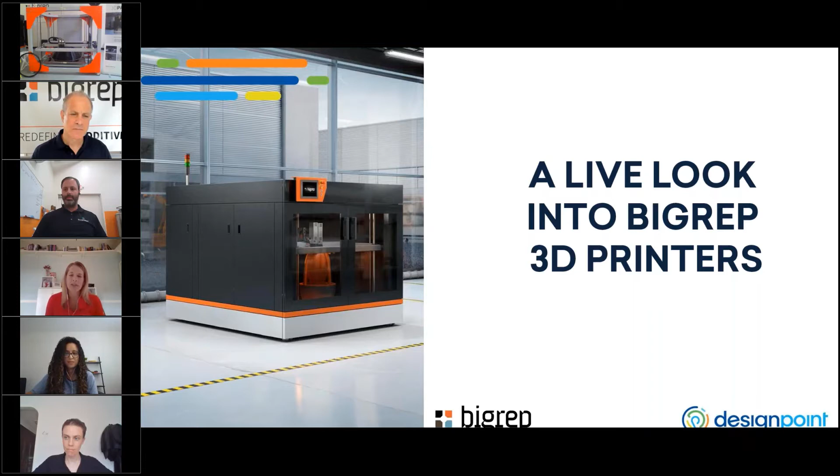What we're going to do today is kick it off with Andrew and Frank. They're just going to give a pretty high-level introduction to who BigRep is and Design Point, and I'm sure many of you already know that. Then we're going to go live to Chris in Boston to do a demo. He will give a demo on the 1, the Pro, and the G2. And after each one, he's going to pause for questions.

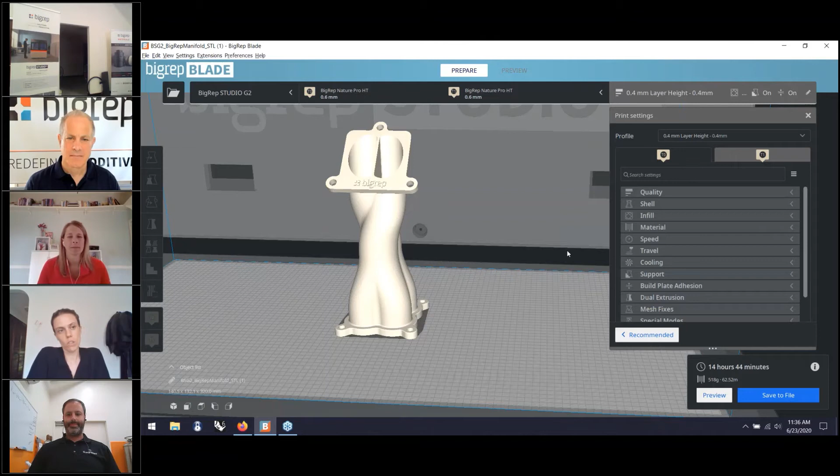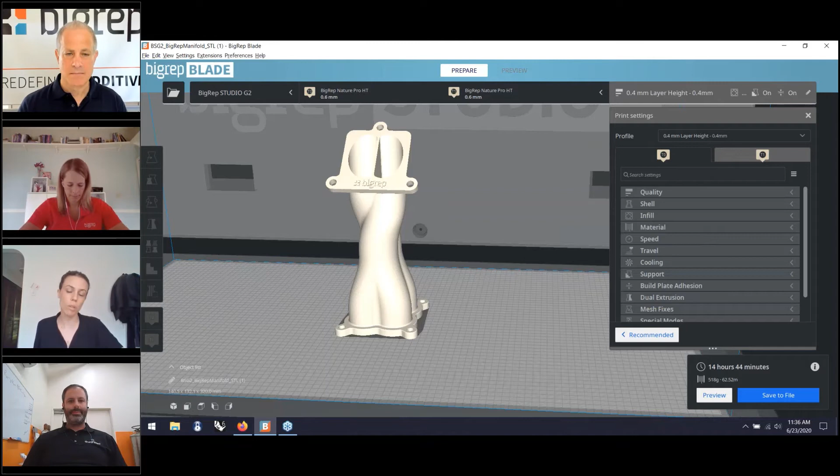I'm here to talk a little bit about our in-house slicing software called BigRep Blade. It's been developed over the last year and a half in-house with our software team, working together with R&D, materials, and our engineers to make the most optimal slicing software, particularly for large format printing and BigRep machines. As you can see, the layout looks slightly like Cura.

If you've used Cura in the past, this will probably feel familiar to you. Also, it is free software that we provide via our website, free for download if you'd like to have a look at it after this webinar.

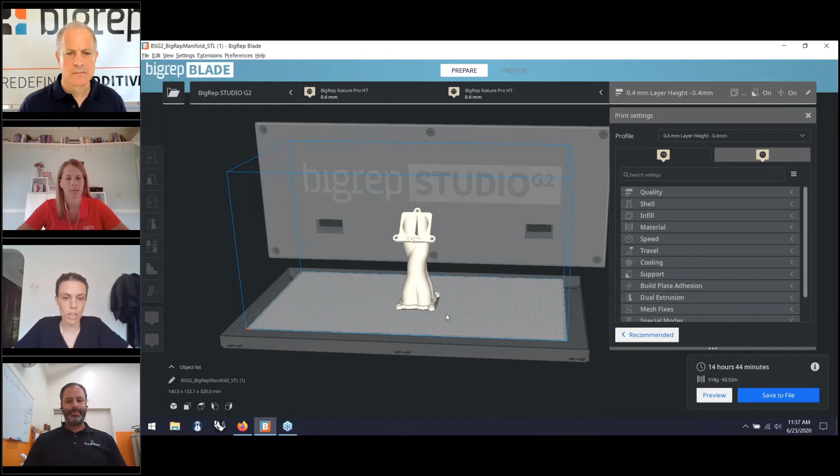Some important parts that we integrated after working with third-party software for a long time was really getting options to help you optimize speed and material usage. So as you can see here, I have the BigRep Studio G2 machine loaded up, and this is one of our test parts, a manifold part.

You can see up here you're able to switch your machines according to which one you're using. On the side here you have all your typical tools in terms of scaling, rotating, and moving. And up here you have the dual extrusion options, both our hot ends, both extruders, T0 and T1, and then a list of all sorts of different materials you can use on our machines.

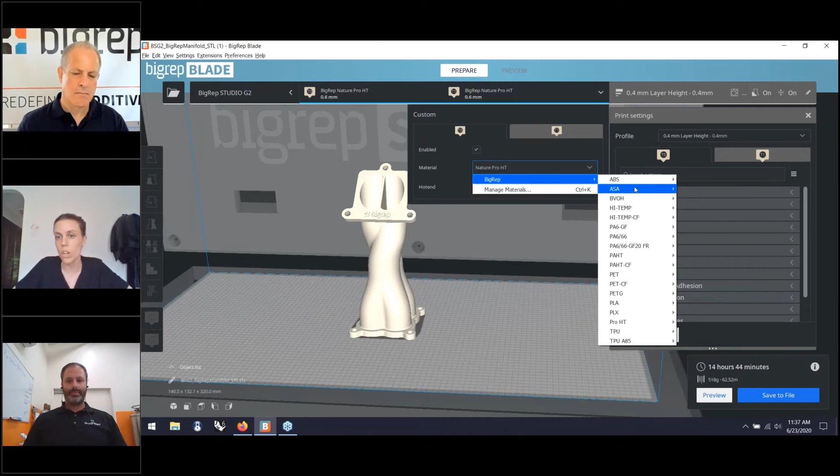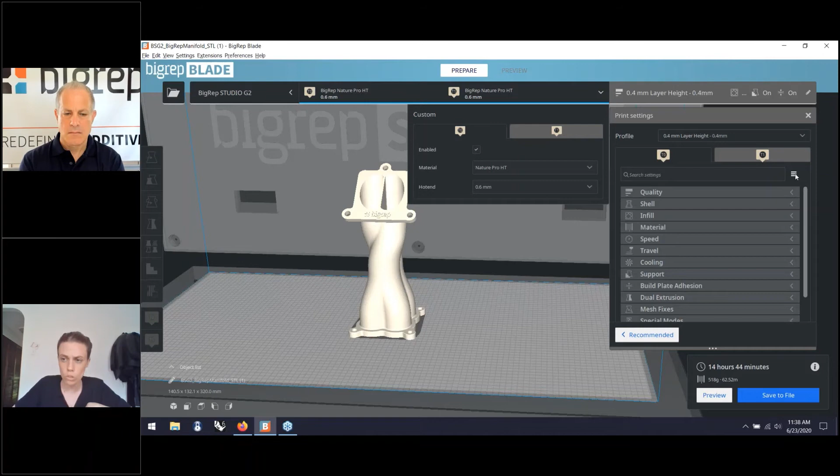The great part also is that we provide you with presets, essentially. So if you don't feel super comfortable slicing and you purchase a machine, or you're new to 3D printing, our team has worked on setting up the best possible options for you. But you can also go in if you are really experienced and tweak and make a lot of changes particular to your print and what you want.

I will go to preview here as I've already sliced the file, just to make it a little bit quicker. The other great part is seeing that preview of your print. That's something we pride ourselves on, that we have a really great preview. You can also slice down and see how the part will build itself up.

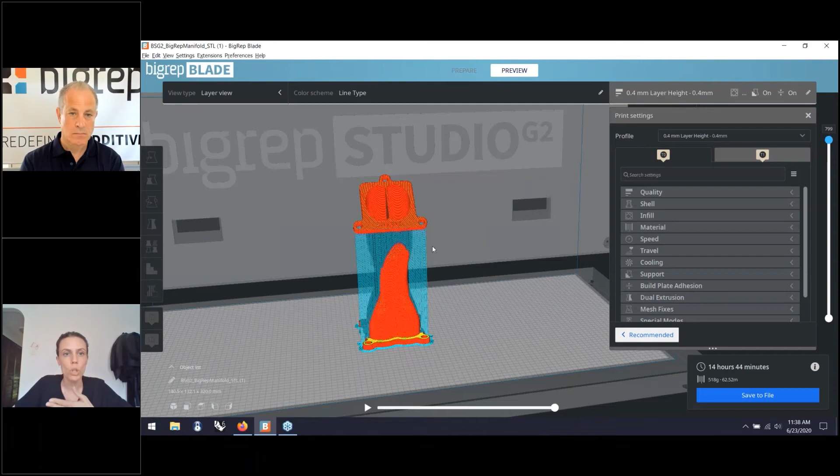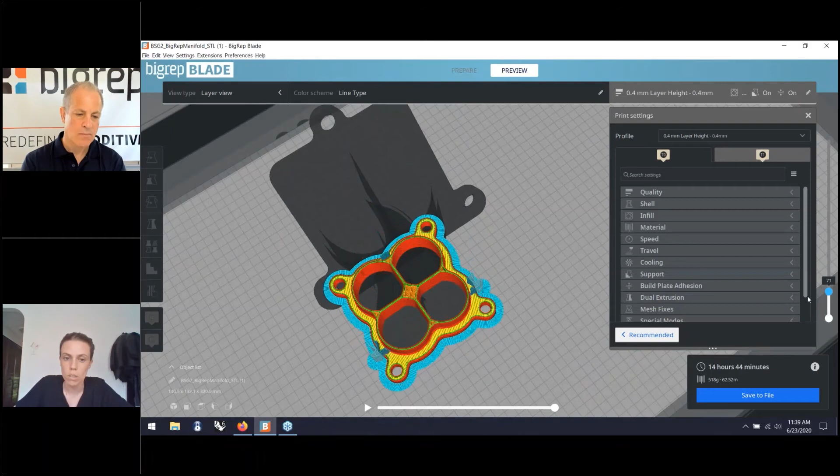Right now I have it on a view showing colors specific to what the line type is. You'll see that red is our outer loop, blue is support structure. This bright blue down here is actually a brim to help hold it onto the bed. Yellow is top surface. As we move through this part, you'll also see infill and what the interior looks like. It's really great to show you the expectation of what you should see when your print finishes.

Lastly, down here you'll see your print time, which we pride ourselves is very on point. You'll also see the amount of material you use, so it allows for easy pricing out. It also breaks it down into what exactly, if you hover over this info button, is taking the most time and what isn't. That's just a further step in terms of optimizing your print and making it faster.

Anyone from my team have points to add to this?

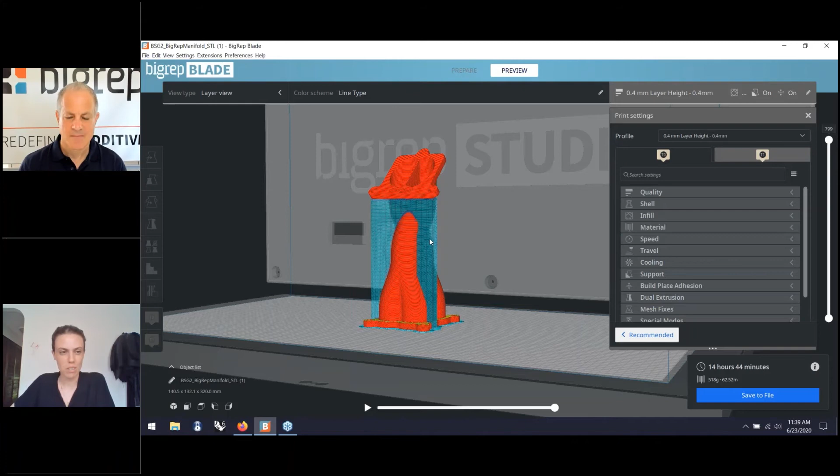Just one quick question we've got: do you have to use this software? You don't have to, except for our Pro machine. For the Pro, you do have to use it because of our new MXT technology. But otherwise, if you're working with our Studio machine or R1, we still offer factory files for Simplify 3D, a third-party software. You can also use Cura or other slicing software. But since this is a free software, we do recommend using it, as it's where we've spent the most time figuring out what would work best on BigRep printers.

Right, great. Does anyone have any questions for Maggie? I mean, it looks so easy.

I guess one last thing I'll say is when you go from Blade, you'll see here save to file. So how you upload onto the machine is either through your computer if you're connected with an Ethernet cable, or you can just easily save it to a USB and upload it manually.

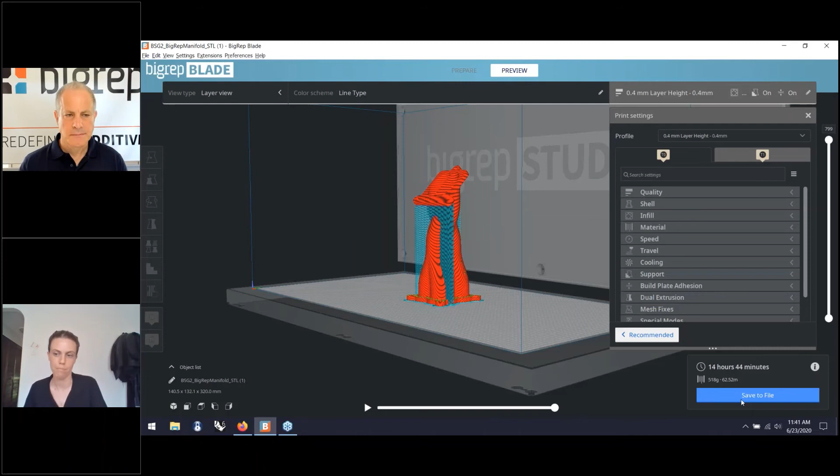Great, very important there.

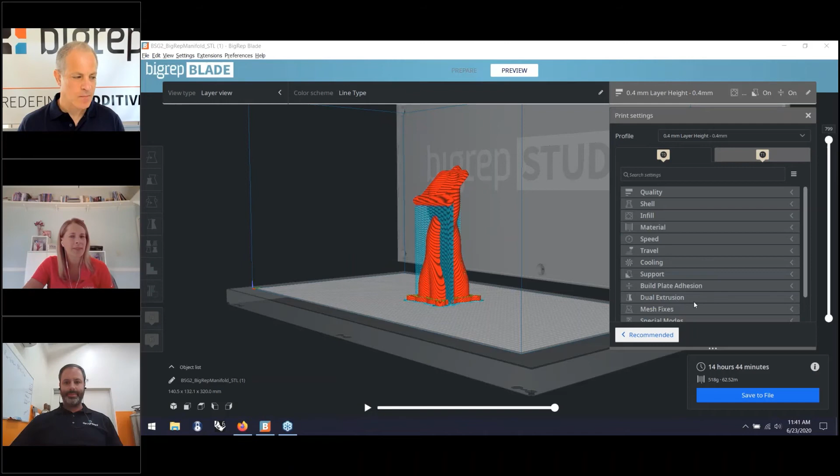Give me one second just to pull that out. If Frank and Andrew want to talk, Andrew, maybe we'll test to make sure your audio sounds good. Does not sound good, we don't hear you at all now. Frank, can you talk? Frank, we don't hear you either. One second. Oh, all right. Do you hear? Okay.

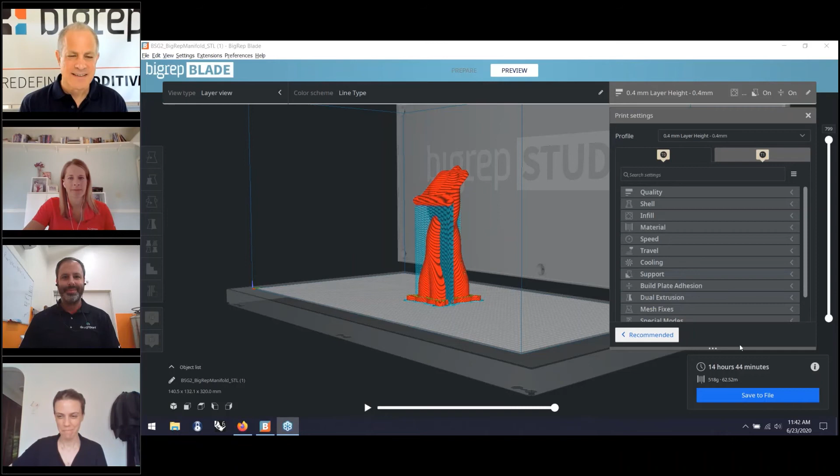Oh Frank, there we go. Okay, guys can you hear me? I'm joined in by phone now versus the computer, so hopefully this goes a lot better this time. Frank, yours shows that it's self-muted if you want to hit that icon. Okay, I was trying to unmute it, so I guess I unmuted and muted. Ah, perks of technology. All right, let me launch this poll.

So we are curious to know what type of applications you're currently doing or interested in doing. Why don't you guys let us know? Whoa, I love that a lot of you are saying all of them. We'll give you guys a few seconds.

Bars are moving, a lot of people are responding. So 100% of you are saying that you're interested in prototyping, 86% are interested in tooling, 100% are interested in patterns, molds, and castings, and 71% are interested in end-use parts. Wow, pretty awesome.

All right, that's some food for thought there. Maybe we can, Lori, quick turn Maggie's. There we go, and let's make us all big again.

Okay, while you're working through that, Abby, a couple things came to mind when Chris was doing the demo. By the way, Chris and Maggie, great demo. I think it's as close to showing the system in trade show mode as we could, so I hope everybody appreciated that.

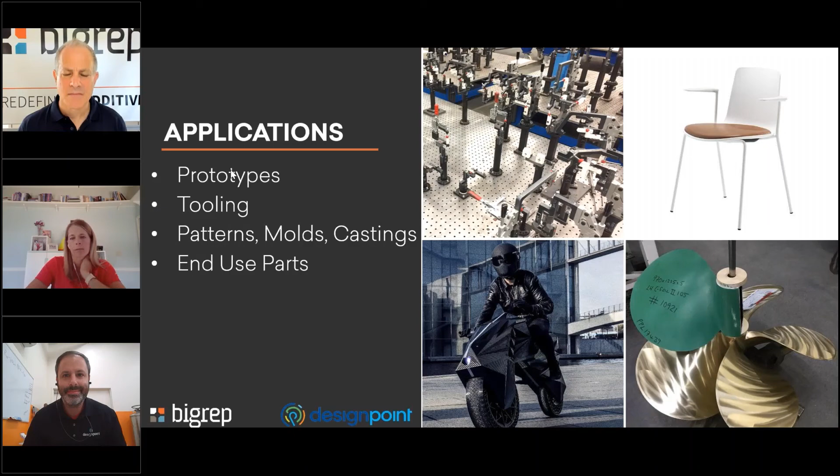So the reason it hit close to home was we had some personal experience with making PPE at DesignPoint. Basically COVID hit, and once it got to a point, we said we want to form a team to see how we can help. We took folks from marketing, 3D printing, sales, operations, formed about a 10-person team, started meeting every day, and very quickly realized we've got a unique capability in 3D printing, so we should be making PPE.